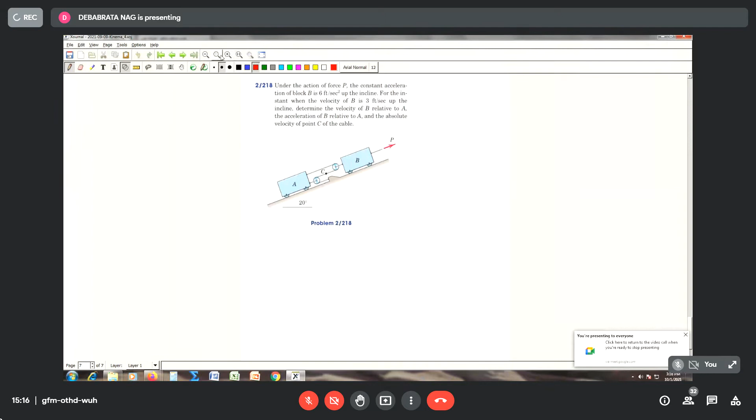Right at the end. Okay, so first we discuss this fact. What does it say here: under the action of the force P, the constant acceleration of block B is 6 feet per second square up the incline. For the instant when the velocity of B is 3 feet per second up the incline, determine the velocity of B relative to A, acceleration of B relative to A, and the absolute velocity of point C of the cable. I'll calculate the velocity, and you can calculate the acceleration yourself.

What we do here, suppose I take this fixed point as my reference. So from here I actually measure down these distances. Suppose this is XA, and from here I call this distance XB. I call this distance XB, meaning the distance of the center of the pulley. Because this is massless, we can write it like that.

Now our string length is how much? So this will be XA, correct? And this distance you can ignore. So it is as good as considering this, because this length of the string is constant. So you can write this is A, this is A. So then the total length of the string, ignoring the portion wrapped around the pulley, will be how much?

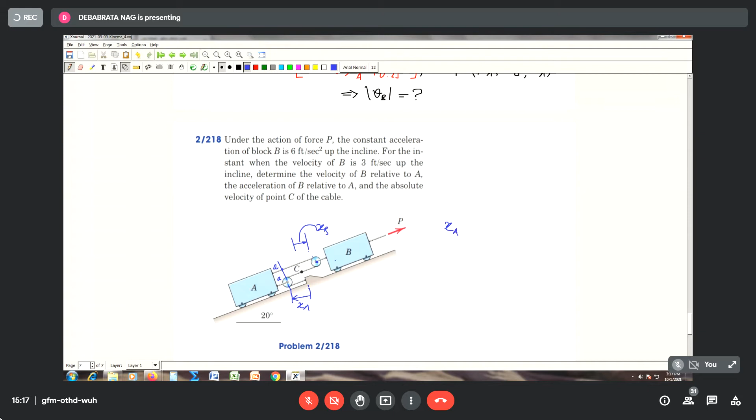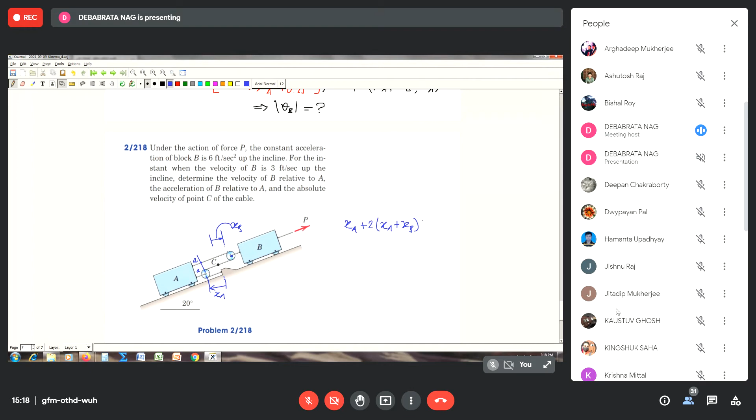This will be XA. So we can say this is XA here. Then this much will be XA plus XB, because this is XA, so the remainder is XB. So XA plus XB. Again, another one will be XA plus XB. So we have 2 into XA plus XB, then plus 2A is going to be constant. So we can write from here that it will be 2XA, meaning 3XA plus XB.

2XB. 2XB is going to be constant. So if that is so, you just differentiate it with respect to time. So you will be getting 3 times velocity of A plus 2 times velocity of B, that is equal to 0. Now it is given that constant acceleration is given when the velocity of B is 3 feet per second up the incline. So it means that your VB is given.

So we can say therefore that VA is equal to minus 2/3 of VB. VB is given 3 feet per second up, so it is positive. So it means that it is minus 2 feet per second. So if this one goes up, then this block is also going up, correct?

So determine the velocity of B relative to A. We can write VB relative to A equal to VB minus VA; we align the vectors in this direction. So this is VB and this is VA. Both velocities are in the same direction. So it will be 3 minus 2, so 1 feet per second. The relative velocity will be 1 feet per second.

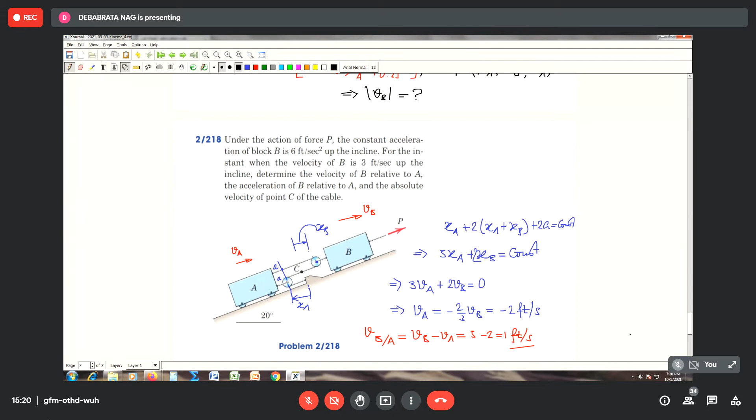And the absolute velocity of point C on the cable. So point C is here. You see, one end of the pulley is fixed. So if this is the pulley, then this side it is fixed. So the pulley will try to roll with respect to this point, and the center point's velocity is provided, VA, in this direction. So it is 2 feet per second.

So quite naturally, because this is 0, the other end's velocity profile will be like this. So this velocity will be 2 times this velocity. If this is 2 feet, then this must be 4 feet per second. So VC, velocity of the point C on this cable, is going to be 4 feet per second. All are up the plane. You understand? Yes, sir.

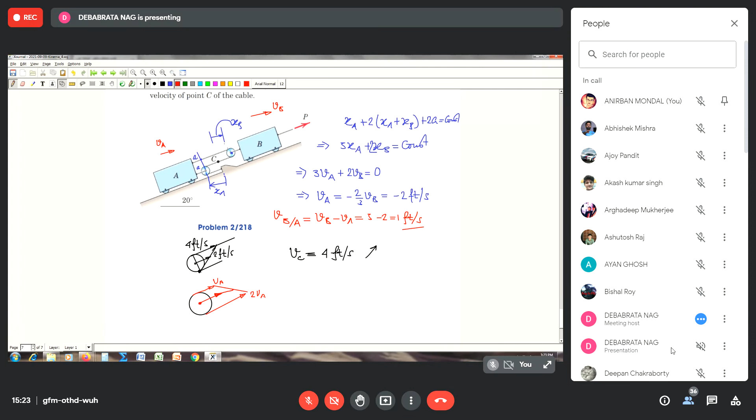So it means that it is a trapezium, and this is the middle point of the trapezium, which will be half of the sum of these 2 sides, correct? So this point's velocity will be, I mean to say this one, the velocity VB. So we can say VB is equal to half of the sum of these 2. So it means half 3 times VA. So it is 3/2 VA, and this is VB.

VB is 3/2 VA. So since our interest is to find out VA, we can say therefore that VA is going to be equal to 2/3 of VB. So similarly is the case with the acceleration. Now I think you got the point.

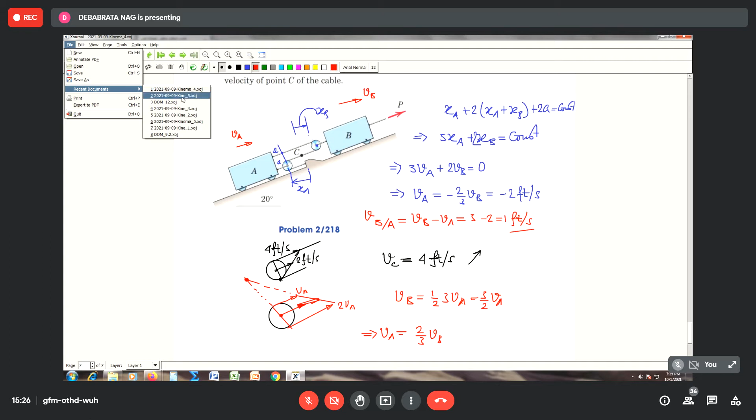So from there you will be getting it. Okay? Yes, sir. Okay. Then let me start with our today's class. Just a moment. So today's class is about the system of particles.

So we are to study the dynamics of a system of mass particles. Suppose we have a system, and that system consists of n number of mass particles, and any ith member of that group has mass mi, where i is running from 1 to n. Small n is the total number of mass particles. So this is mi, such that this group consists of a definite amount of mass.

So I can say sigma mi, that means if I sum the masses of all the particles from i equal to 1 to n, this gives me m sys, which is the system's mass, and this is constant, correct? There is no depletion of mass at any point of time, neither is there any addition of mass into your system. So you have 1, 2, 3, 4, n number of particles here, and they are moving of their own.

It is not necessary that the motion of one particle is dependent on the motion of the other, because in our previous analysis, thus far, everywhere we have assumed that the motion of such particles is always dependent on each other, right? This we are not assuming here. So everyone is moving of their own. No one's motion is influencing the other one.

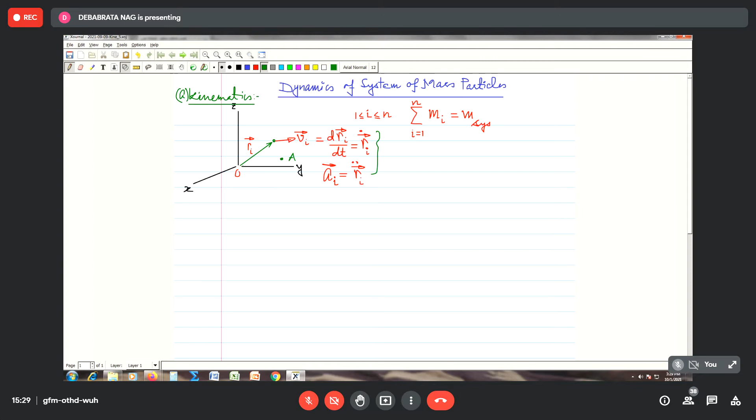It is also having some mass, and the position vector of point A with respect to the origin is, of course, this one. I call this position vector r bar A, where A is any arbitrary particle. It may belong to the group or it may not belong to the group. So we take this A as an arbitrary particle whose position vector is known to be equal to r bar A. If that is known to us, then we will be able to find out the relative velocity of this ith particle with respect to point A.

So how will I be getting the relative velocity? We need to find out this position vector. We define this blue vector as rho bar i. Rho bar i is the relative position vector. This is the relative position vector of mi with respect to the particle at A, or point A.

So I can therefore say that the relative velocity of the ith particle, v bar relative i, the relative velocity of the ith particle with respect to point A, where A is an arbitrary point, can be written as rho bar i dot, since it is d/dt of rho bar i. Rho bar i is equal to r bar i minus r bar A. So passing the derivative into this, we can say that this is v bar i minus v bar A. That is the definition of the relative velocity of the ith particle with respect to an arbitrary point.

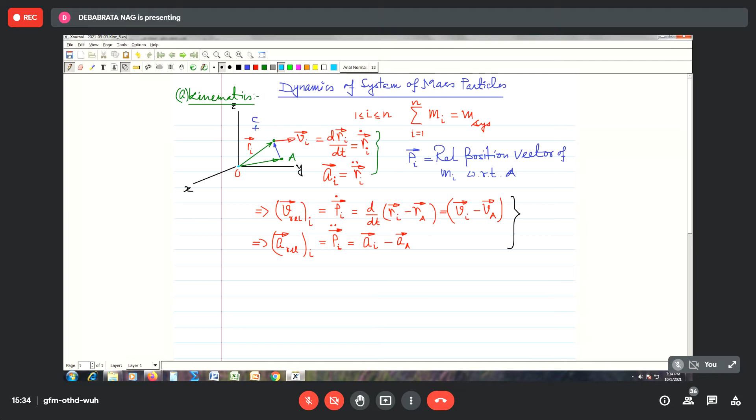So you will be able to locate the center of mass position vector, which will be the line joining O and C. I am not drawing it because otherwise it will get cluttered. So this O to C represents the position vector of the center of mass at this instant. Please note, all these are functions of time. So this will represent the instantaneous position vector of the center of mass.

The instantaneous position vector of the center of mass is defined as r double bar; this bar sign on anything indicates that it is referring to the center of mass. So how can we define this? We know from our definition that it must be equal to the summation over i from 1 to small n.

It will be mi into ri bar divided by summation i from 1 to n mi. So it indicates therefore that since this is equal to Msys, I can therefore say that Msys into the position vector of the center of mass, absolute position vector of the center of mass, is nothing but the sum i from 1 to n of mi into ri bar. This is how you are getting the center of mass's location.

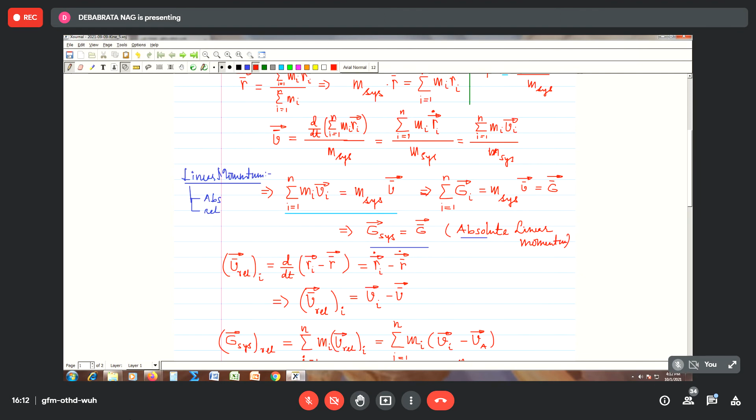That means A is basically equivalent to O, the fixed point. So if this is an inertially fixed point, see we told in the initial case that point O is a fixed point. You remember? Here in the drawing I have considered that point O is a fixed point. That means if the point A becomes fixed, you see the relative angular momentum and the absolute angular momentum both will be equal. There is no distinction about a fixed point whether we are going to calculate the relative or absolute angular momentum.

And Vishal gave the third clue. He said that when rho bar and V bar A will be parallel. So rho bar and V bar A will become parallel. What is the physical meaning of it? It means that they are collinear basically, correct? They are collinear. So the physical meaning of that is that the velocity of point A must be directed either along this vector or opposite to this vector, correct? Then also the same thing would happen, right?

So see this bluish, sky blue vector here. If the velocity of point A is along this line or opposite to this line, then you know that the cross product between them will be either sine 0 or sine pi in magnitude. So naturally that should be equal to 0. The magnitude becomes 0 means the vector becomes null. So that is the third condition. Then there is a second condition. What is the second condition? Can you tell me what will be the second condition?

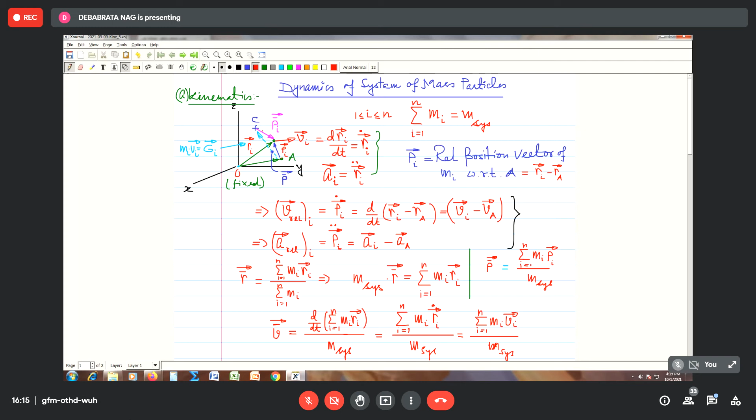That means when A becomes equal to C, the point A becomes actually the center of mass of the group. So under these three conditions: condition 1, that point A will be absolutely fixed. Condition 2, when A is becoming equivalent to C, the center of mass of the group. And the third condition, which is a little bit awkward, when they are parallel or the velocity is along the vector. So these are the conditions under which these two angular momentums will be equal. It does not matter whether I am calculating the relative or the absolute momentum, it remains the same. Please remember these three conditions.

This chapter is the introductory chapter of your rigid body dynamics. Going forward, you will be studying advanced dynamics in the next semester, and there also you will require all these basic theorems. They must be very clear to you so that you can understand the concepts going forward. So these are your three conditions. We have fully introduced the kinematic terms, saving only one. One more term is left, again a kinematic term, and that is termed the kinetic energy of the group.

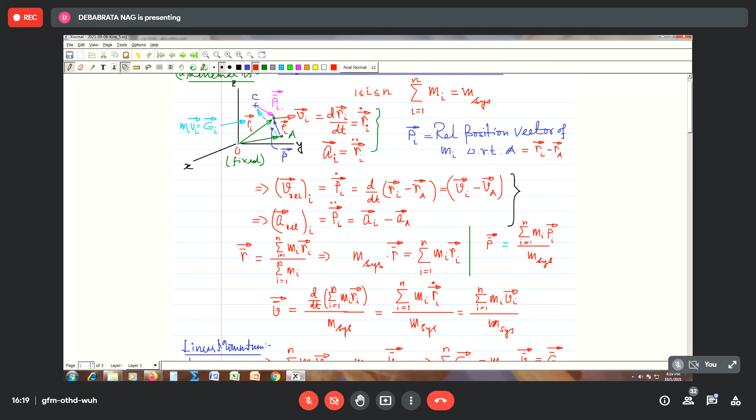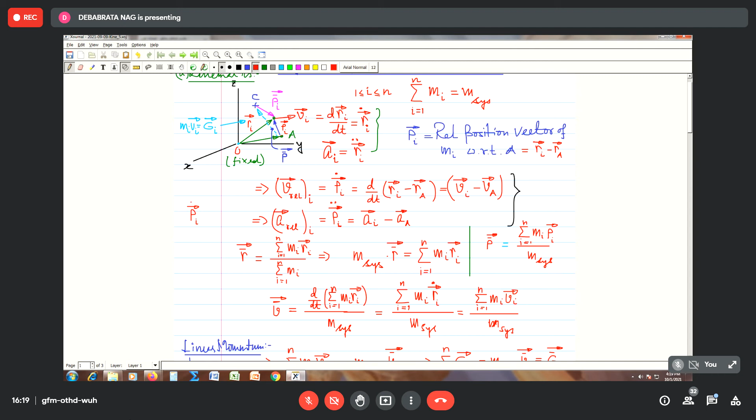Going back again to the figure, this is your center of mass, this is the ith particle, and here you have this vector. The derivative of this, rho bar i dot, represents the relative velocity of the ith particle with respect to the COM C. So C represents the COM, and the derivative of this represents the relative velocity of this ith particle with respect to point C.

So naturally, I can write the absolute velocity here in this fashion: the velocity of the center of mass, V bar, plus rho bar i dot, dotted with the same quantity, V bar plus rho bar i dot. So we can write this equation in this manner.

Now if you perform the dot product operation, the system's kinetic energy becomes equal to half sigma i from 1 to n of mi times V bar square plus rho bar i dot square, the bar is taken out because it is scalar, plus 2 V bar dot rho bar i dot. So this is how we can do the dot product operation of the vectors.

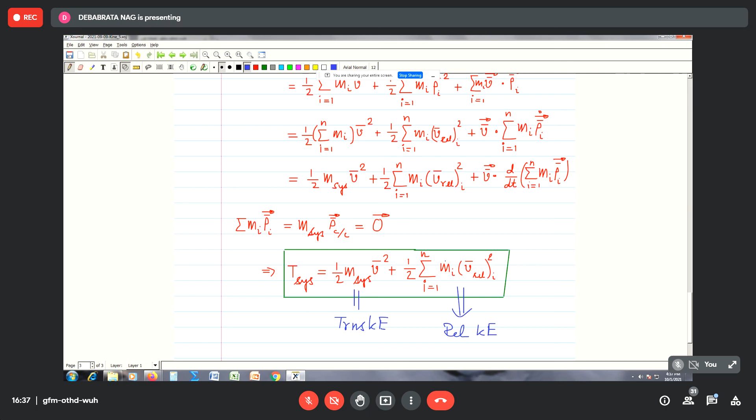Why I say time and again that it is the building block of our dynamics of rigid bodies is because a rigid body can be defined as a system of infinitely many masses. That means this n tending to infinity, and when the distance between any two particles is constant in magnitude, that is the mathematical definition of a rigid body.

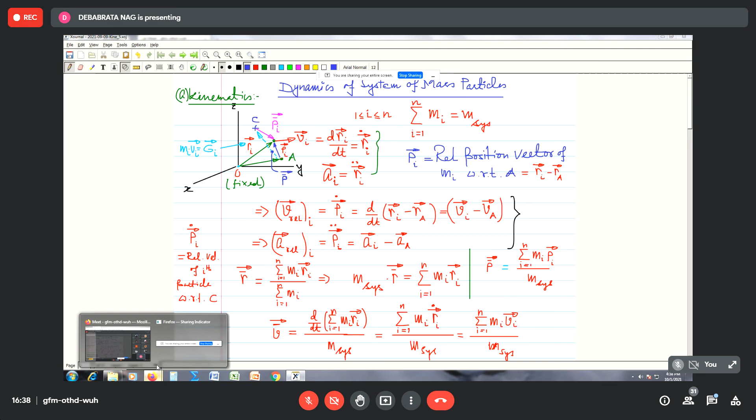So here we have discussed the kinematics portion today, and in our next class we will be taking up the kinetics of the group of particles, and then we will try to correlate the concepts of the kinetics and kinematics.